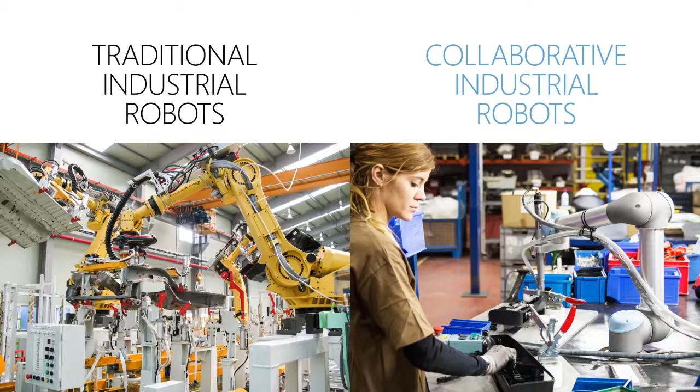Most of you are probably familiar with traditional industrial robots like the ones you see on the left side of the screen, but some of you may be slightly less familiar with collaborative robots, or cobots. You can obviously see the difference in size and the amount of safety equipment needed with the traditional industrial robot. Collaborative robot automation really is the way that the market is moving forward.

So what is a cobot? A cobot is simply a robot that is designed to work safely with or near human coworkers. While safety is obviously a key aspect of a cobot, UR takes the term collaborative a step further and also includes ease of deployment, ease of use, and maintenance.

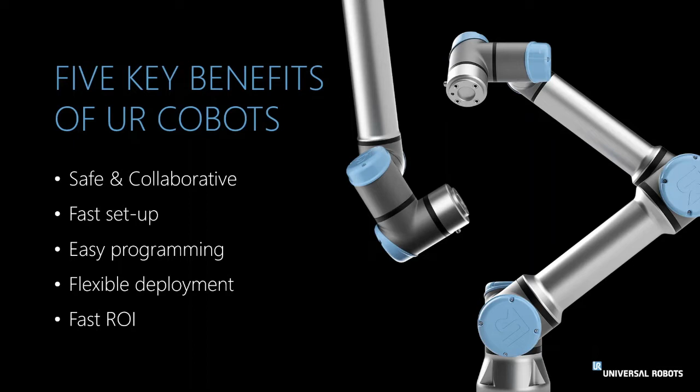So while safety is in fact a key aspect of our cobots, what really sets us apart is that we are fast to set up, easy to program, and flexible to deploy and redeploy. All of those benefits combine to give Universal Robots an industry-leading fast return on investment.

So what are some ways that cobots can help your company? Cobots are excellent for automating current manual tasks, and can greatly increase efficiency, quality, and throughput in many manufacturing processes. At the end of the day, this can help to shift workers from those dull, dangerous, and dirty jobs to higher value-add tasks that workers really prefer to do.

Collaborative automation is really a new way of thinking compared to traditional robot automation. What I mean by that is humans and robots should be collaborating, because both are uniquely good at doing their own set of distinct tasks. Humans, for instance, are really good at new, unique tasks and problem solving, where robots are really good at the more repetitive tasks. So combining those really creates a lot of value and productivity.

UR's average payback time is typically less than one year. The payback time you get from your cobot can obviously vary, and we've seen ROIs as short as 34 days, in the case of Task Force Tips, a manufacturer that uses our cobots for machine tending. So I encourage you to check out this case study on our website and many others like this.

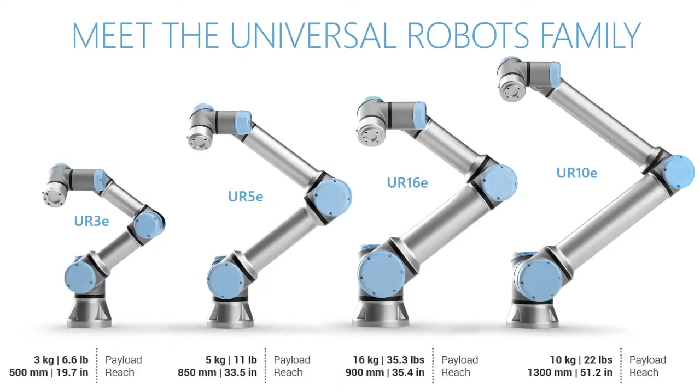I want to introduce you to the UR family. Universal Robots has 4 models: the UR3e, 5e, 16e, and 10e. The model number indicates the payload capacity in kilograms. So based on the model, our payloads range from 6.6 pounds up to 35.3 pounds, and our reach ranges from 19.7 inches all the way up to 51.2 inches.

The UR controller is available in 2 different variants: the standard E series, which comes with an IP44 control box, and the OEM version, which is basically the guts of our standard controller and can be built into a custom panel.

The controller comes standard with 16 in, 16 out digital I/O, 2 in, 2 out analog I/O, and an Ethernet interface used for Modbus, Ethernet IP, and Profinet. As far as power requirements, our controllers run on a 120 volt standard outlet. Our controller is fairly compact, roughly 19 by 16 by 10 inches, and weighs right around 27 pounds.

I want to talk a little bit about UR+. UR+ is another way to speed up your deployment. The UR+ ecosystem is a big differentiator for Universal Robots. It's made up of hundreds of tested and certified products that are ready to plug and produce with your cobot.

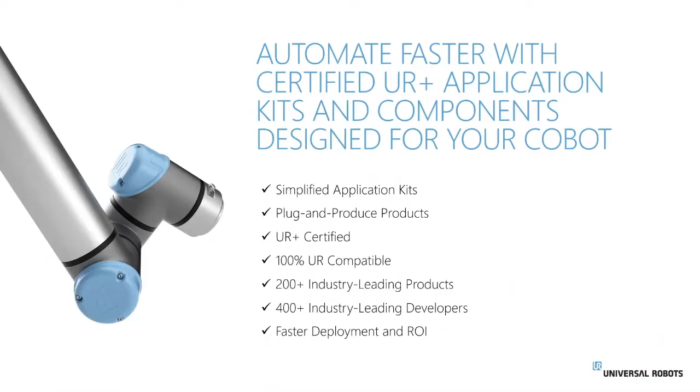The goal of the UR+ ecosystem is to shorten the time it takes for you to implement your automation project. To get you there faster, we have a selection of hundreds of products across dozens of different applications that have been certified by our team to be easy to use, compatible with your cobot, and ready to go with all the software, hardware, and everything you need to get started.

On the UR website, you can explore all the different UR+ plug and produce tools for your cobot applications. This is a small sample of some of the partners on UR+. We have over 400 partners, and this is really growing at a fast pace.

I want to shift over to training quickly. The UR Academy is an industry-leading training academy offered by UR, both in-person instruction and also complimentary e-learning online.

UR is the only robot manufacturer that offers training of this caliber free of charge. We think it's vital to narrow the skills gap and get more people up to speed with robotics faster. So for small and mid-sized manufacturers, this can also be critical to how you address some of your labor challenges.

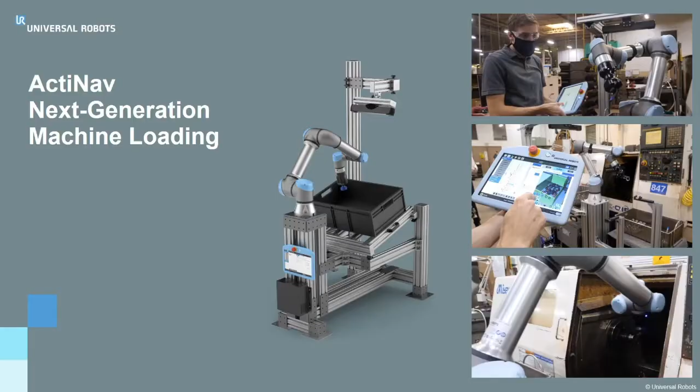With that, I would like to turn it over to Eric Anderson, UR Product Manager, to talk about ActiNav and to demonstrate our autonomous bin picking solution.

Thanks for that great introduction, Ernie. Again, my name is Eric Anderson. I'm the Product Manager for ActiNav, and it's a real pleasure to be with you here today. So where shall we begin our demo?

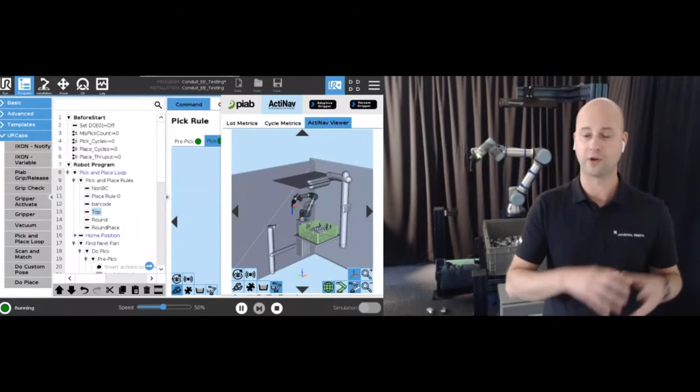What is ActiNav? ActiNav is the platform. ActiNav, of course, needs 3D scanning and matching algorithms, but it ties all of this together into a product designed exclusively by and for Universal Robots, into an ultra reliable and ultra easy to use system. We're going to talk about what technologies are built into the product that make it so unique, reliable, and easy to use.

So let's get through the demo. We'll start to use the system, and as we go, we'll answer some questions along the way. The setup behind me is running at just half speed, nice and safe. Let me get that out of the way there. And so it's a UR5E.

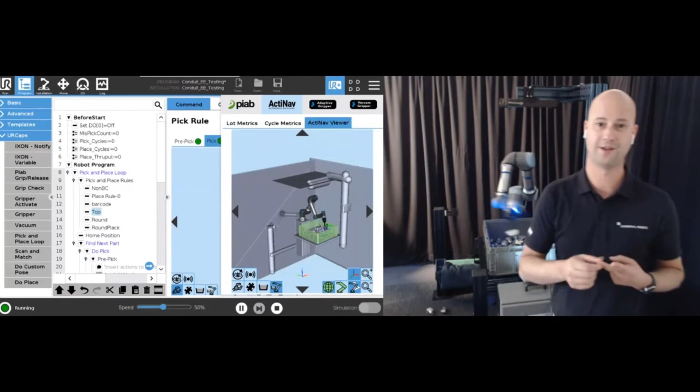ActiNav works with the UR5E and 10E, and the ActiNav kit consists of three main pieces: the user interface, which is installed on the teach pendant, so all programming is on the teach pendant; a 3D sensor, mounted right here, which I'll explain in more detail; and the third component, the autonomous motion module.

There's a black motion and vision processing unit that's connected to the robot controller via Ethernet. So those are the three pieces. On top of that, what you need to add to the robot plus the three pieces of ActiNav is an end effector that's suitable for the part or the application you're doing.

Of course, some custom framing is needed too. This is actually a standard frame designed by Vention for the UR5, for ActiNav with the UR5 and a medium sensor, as well as whatever placement target, regrip fixture, inspection cameras, sensors, switches, and other things you might need. So those are the major pieces.

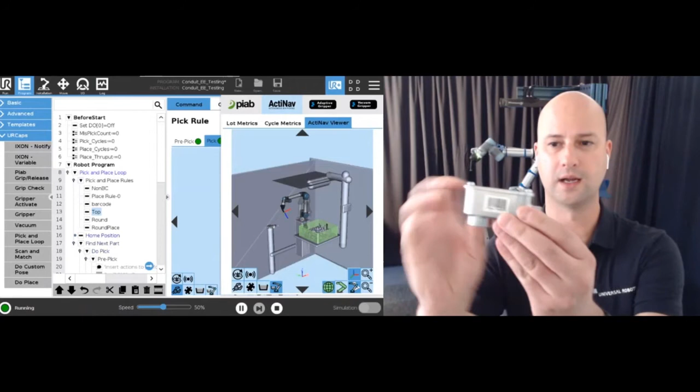The part we're going to be picking today is this demo conduit part. It's a somewhat shiny metal part. We're going to be picking from the top.

This side we call the barcode side because it has a barcode, and this side the clear side. You can see it's a completely unique 3D part, unique geometry. It's planar symmetrical in this way, but we're going to pick it from three different ways.

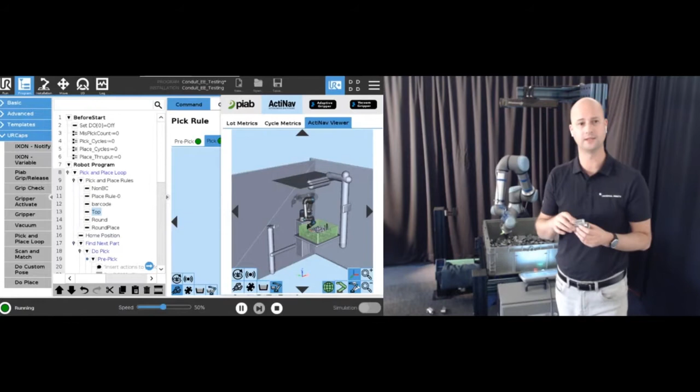We're going to place it in a fixed location. ActiNav works with any end effector, so it works with a whole variety of UR Plus pre-certified end effectors, or you can design completely your own custom end effector.

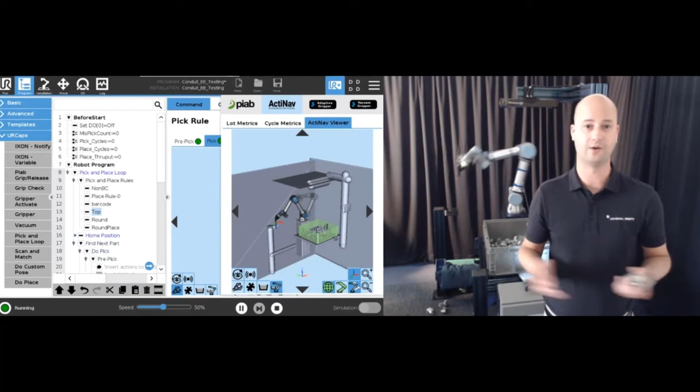But regardless, ActiNav, when it operates, is going to be completely collision-free and singularity-free, not just of the robot from hitting things, but the robot, the end effector, including custom end effectors, and the part while holding the part. So also the part will not hit anything in the environment. So the question is, how is this possible, and how does this thing work?

Let me go ahead and stop it, and we'll walk through the setup. Now, the setup is a 6-step setup to configure the system, and we'll just walk through the major pieces there. Okay, so here's the 6 steps.

So step 1, you get a robot, you get an ActiNav, you get a frame, you get an end effector. You bolt it all together. What happens? You take the AMM, the autonomous motion module, and an Ethernet cable that comes in the kit, and you plug in that computer, that processing unit, into the UR controller.

And that basically now augments the capabilities of the UR cobot with autonomous motion or self-deterministic motion. It's very simple to do that. You hit this pair AMM button. And what happens when you pair the AMM with the robot is it identifies the model of the robot.

It pulls in the calibration files that get set at the factory, so we have an exact model of that exact robot that AMM is connected to. Okay, so now we know what robot we're connected to, and we have a 3D model of it.

The second thing we're going to do is mount the 3D sensor. So we take the 3D sensor out of the box, mount it at the appropriate distance above the bin, and we need to perform alignment.

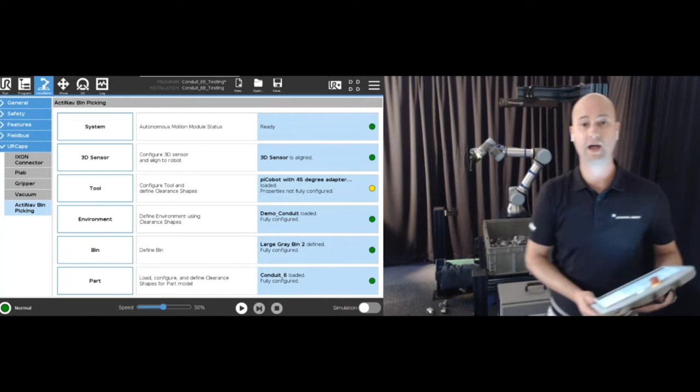So what you do is this dome comes in the kit, this half dome. You attach it to the end of the robot, and you take the robot in free drive mode. So it's got this great free drive functionality on the bottom, and just position this dome at 8 different positions underneath the 3D sensor, and then it aligns the sensor space to the robot space.

So that's pretty easy. So we hit a button, we did alignment. That's probably 15 minutes. The next thing is the tool.

So I mentioned earlier that when ActiNav is running, the robot, the end effector, and the part will never collide with anything in the environment. So the way we do that with the tool is you can load a CAD model of the end effector, and you can load up to 100 different end effectors into the system.

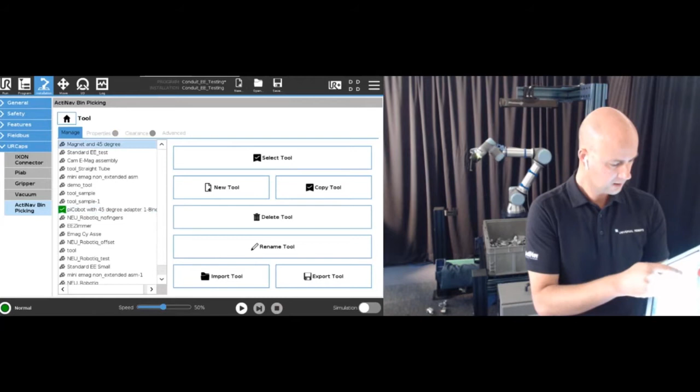And we create clearance shapes. So here's the first introduction to the concept of an environment and clearance shapes. So when we hit that pair button, I'm going to turn the world off. When we hit that pair button and we pulled in a model of the robot and its exact calibration files, we automatically generate these green shapes, these green bubbles around the robot.

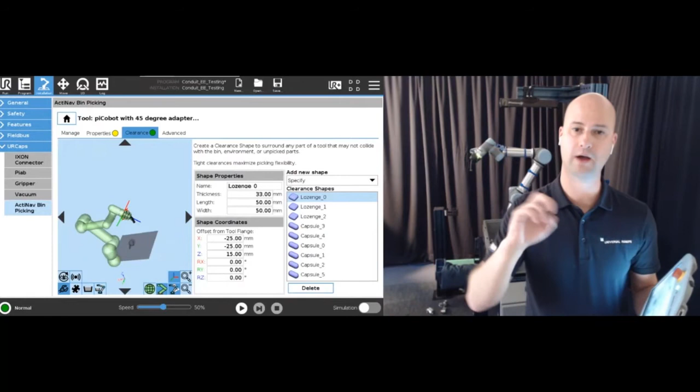And so we know the kinematics of the robot, and we've put shapes around all of the moving features. But the end effector, because we can put any end effector on ActiNav, we don't know about its geometry. So we simply create these clearance shapes. In this case, we've used these lozenges, these little bricks, to sort of approximate and cover the end effector.

So now, when the system moves through the space, those green bubbles around the robot and the end effector will never touch anything in the environment. Okay, so the next question is, well, what's the environment? So let's look at that together.

So you probably saw this on the screen before. So the environment is a simplified representation of anything the robot can touch or anywhere you don't want the robot to go. So they can be real things in the environment or virtual things.

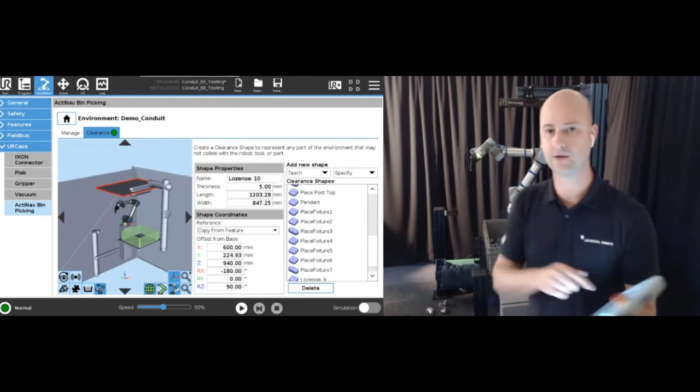So the object I have highlighted here is a ceiling. I've placed a ceiling about here, looks like it's right around the middle of the 3D scanner. The robot will never go through that ceiling. Wherever there are clearance shapes in ActiNav, the robot, the end effector, and the part will never enter any of those shapes. That's how it works.

You basically define what this space, what its operating space is. Real objects, of course, you don't want it to collide with, but also you define where you're going to allow it to operate within.

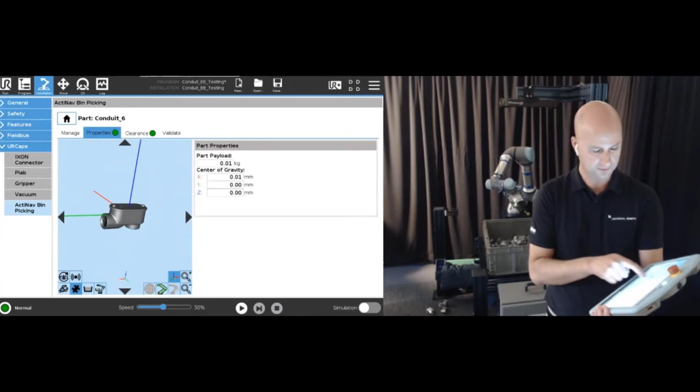Okay, the last piece of the setup is the part. You can load up to 100 different parts into ActiNav. You're of course going to set up your properties. Here's the 3D CAD model. We are utilizing CAD-based matching algorithms. What we found is they're the easiest, they're the most accurate, and also the easiest to set up from the number of knobs and buttons that we need to expose for users.

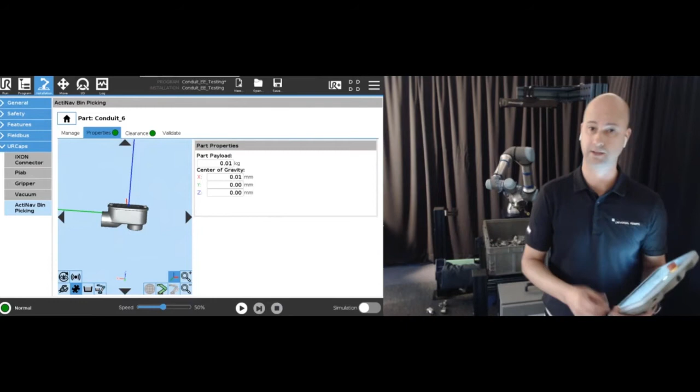They're also very precise and especially useful for the application that we're targeting, which is machine loading, where we expect one type of part to be in the bin. So we don't do any sortation or handle 50 different parts inside the bin and figure out what's what. We expect everything in the bin to be the same. You do a run, you pick everything, and you place that into the machine.

You can see we've added a clearance shape around the part. So if we pick it this way, we're going to move it through the space collision free. If we pick it this way, we are also going to move it through the space collision free. Each path that ActiNav self-determines to take is unique. It's different every time, and it is based on the way that that part is particularly picked.

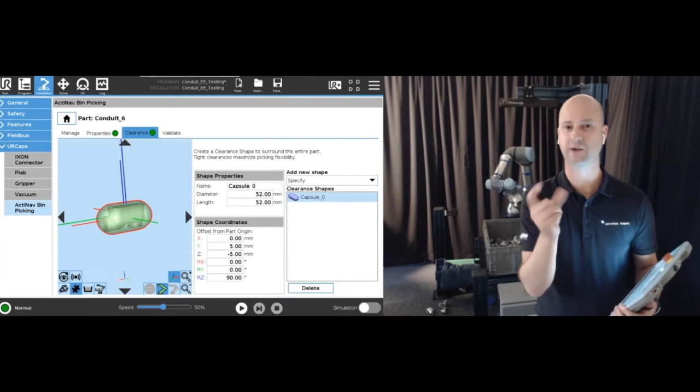In this case, it's a relatively spherish part, right? It's a capsule. But if you're picking camshafts that are this long, it really makes a difference how you move through the space. It's really important to have a model of that part that's picked to make sure that as it goes through the space, the part never collides with anything in the environment.

The last thing that we need to do is set up the CAD matching parameters. ActiNav makes this super simple. There's basically two parameters that you need to adjust, and you can see those here. We support two types of matching algorithms, and there's a couple of parameters for each.

The first kind is volumetric matching. That's really suitable for 3D parts. That's what we're going to use here today on this conduit demo part. You see two values: one is a minimum confidence threshold, and the other one is a quality versus speed slider. Quality versus speed slider is very easy to explain.

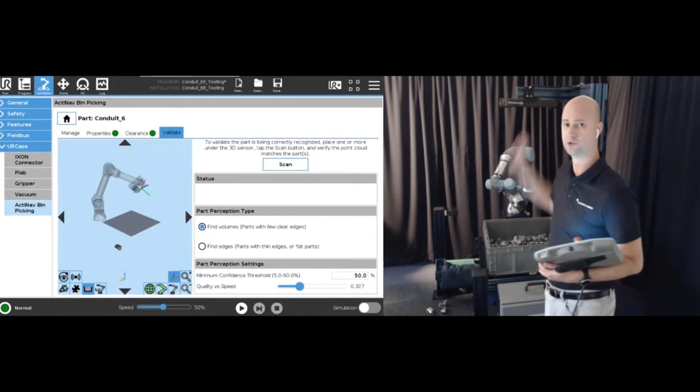The raw point cloud from this very high resolution 3D scanner from Photoneo is capturing 3.2 million points, so it's a very dense point cloud. If you're scanning a big drive shaft, for example, or a large cast part, then you probably don't need all 3.2 million points to do matching on that part. If you're scanning a very small electronic part, you very well may want to use all 3.2 million points. So quality versus speed is just basically a filter for how much subsampling that you do.

And the minimum confidence threshold is simply, imagine that there are 100 points on top of whatever part you can see. So you have a CAD model that has where all 100 of those points should be, and then you have a 3D scan of the part from the 3D scanner. How many of those points need to match the CAD model, the ideal, until you say, yep, I have successfully matched that part? So that's matching.

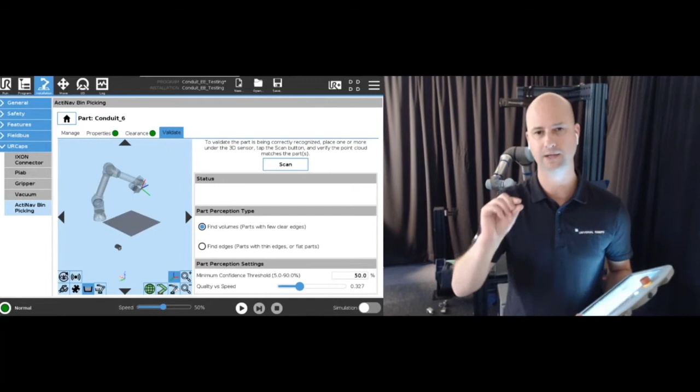The other matching algorithm type is 3D edge detection, and that's really suitable for brackets and sheet metal parts and bent metal, formed metal parts. In that case, instead of looking at 100 points over the whole surface of the part, particularly for flat parts where there's just going to be large swaths of flat, we actually look for the change in normals. In other words, identifying the edges, identifying the bends, the folds, and we actually use that method for matching.

So ActiNav is like a platform. You'll see that it'll support a variety of different technologies over time as we go here. But let's focus on what we have today, which is these two sensors, medium and large, and these two matching algorithms.

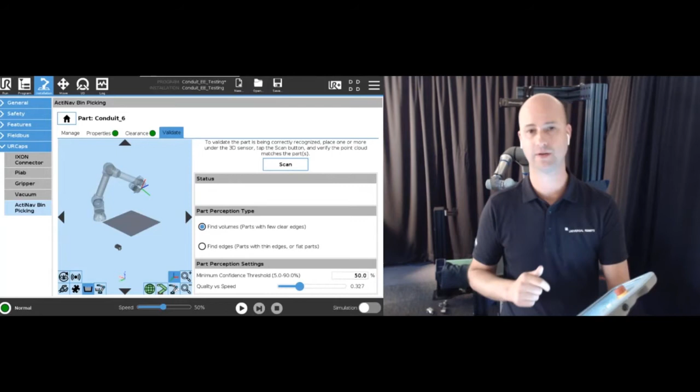They cover a ton of different applications. So, that's the last part of that.

I can tell you we've held multiple training classes, and with a physical setup, robot mounted, end effector sensor, to program these 6 setup steps, for first-time users it's about 2 hours. Once you get a little experience, it's more like 30 minutes. So it's very quick to add new parts, modify the environment, import new end effector types, et cetera.

The ActiNav piece of the program has 4 major sections. There's the pick and place rules. That's where you teach ActiNav together how you want to pick the part and where you want to place the part.

The next section is the home position. That's just a starting point, not necessarily the home position, but a starting point out of the field of view of the scanner. And then you have the 6 steps for picking: home to pre-pick, pick, post-pick, pre-place, place, post-place, and back to home.

For each of those 6 steps, you can set variables, do logic statements, basically anything you can do in UR, you can do at each of these points. You can check if you have a part, check grip, set a counter, check your average cycle time, all sorts of things.

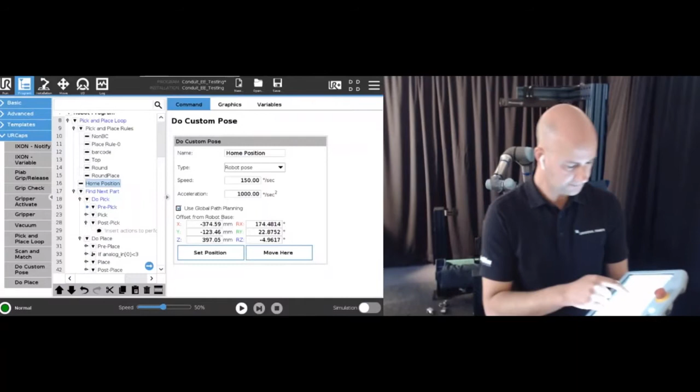ActiNav does any combination of pick and place rules. You can have one pick rule to multiple places, multiple pick rules to one place, or multiple pick rules to multiple place rules. Those are for different workflows. I can mention a few of them now.

What we're going to do today is the simplest workflow, one pick rule and one place rule. What you saw running behind me before is 3 pick rules to 1 place rule.

Some of the workflows that these one-to-many, many-to-one, many-to-many combinations enable: we seamlessly integrate with external 2D inspection cameras. Often you might want to pick a part and hold it in front of a third-party 2D inspection camera, a Cognex, a Keyence, a SICK, or whatever, Datalogic, Microscan. The camera runs its own independently programmed inspection, checking for a ring, a seal, a defect, whatever, and then it sends an I/O signal into the ActiNav program.

You would check the I/O signal, either the part's good or bad. If the part's good, it goes to place location 1 in the machine. If the inspection is bad, it places it into a reject bin or a fail location. That's one example of one pick rule to multiple place rules.

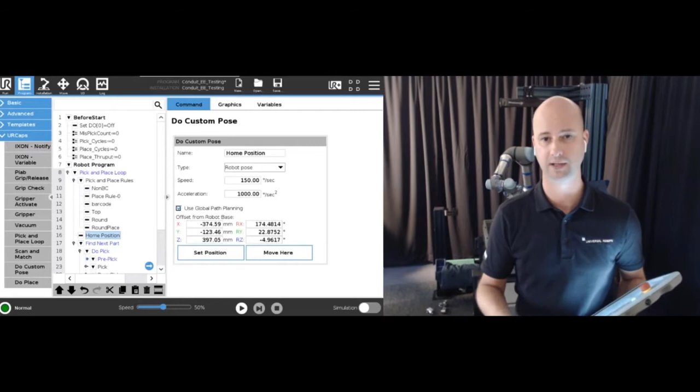Most common is multiple pick rules to a single place rule, because you often need to pick the part in 3 or 4 different ways to get good bin picking, good bin yield, bin pick percentage. But for placement, you might actually need to place it just one way, since it only goes into the final machine one way. That's where you'd have multiple pick rules to a single place. Just a few examples there.

So let's do this: let's suppress all of our pick and place rules, and we'll train a new pick rule and a new place rule. We're going to do this together here.

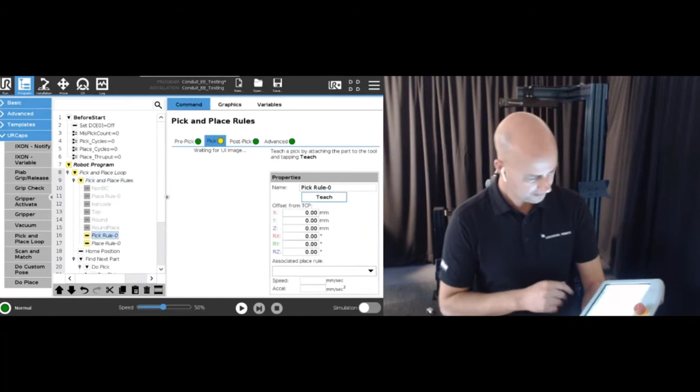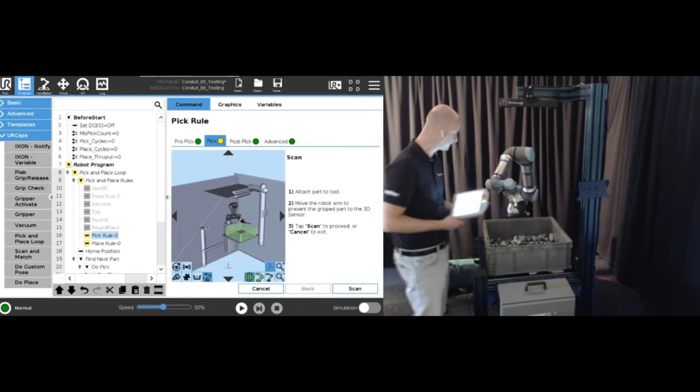So here we're going to train the new pick rule. Again, it's all very hands-on, teach-by-demonstration style programming. When I hit this teach button, it gives me on-screen instructions: attach the part to the tool where you want to pick it, move the arm with the gripped part underneath the 3D scanner, then hit scan. So let's go ahead and do that. We'll put this here, and we're going to pick this part in the middle of the clear side. I'm going to turn on the vacuum.

I'm going to physically attach it where I want to pick it, and then we'll hit scan. You'll see that it's now remembering the way that we have picked that part. And that's it—that is a pick rule training.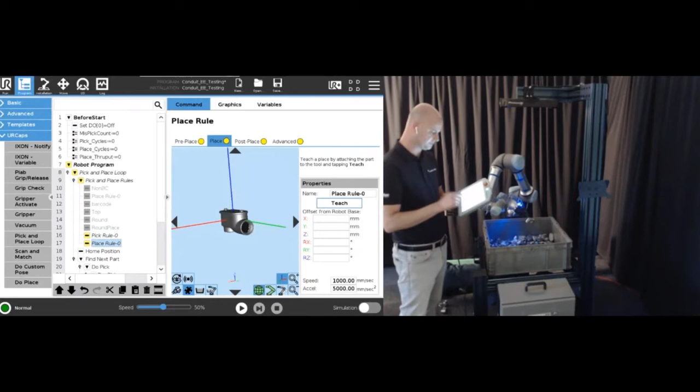Okay, let's do place rule training. Again, there's a teach button. We'll hit teach—it gives us the same initial steps. So we'll go ahead and hit scan. Now it asks us to place the part how you want to place it. So in this case, we'll place it in my hand.

Let's say here—so it's going to place this part in this orientation in space here each time with this place rule. So we'll hit accept that.

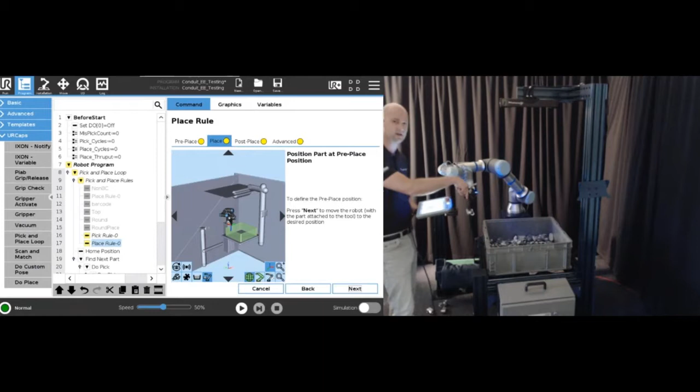And then we want to know, how do we want to approach this place location? In our case, we want to start here, go straight down, and come up. It's a very simple place, but you could have more complex places where you come in from the side, rotate it, and then come up, for example. In this case, we'll just go straight up in the air. So we'll call that pre-place, and post-place we'll just go straight up again, just 2 inches, and we'll hit done.

So the only thing left is to associate the pick rule with the place rule. Is it 1 to many, many to 1, 1 to 1? We're going to go 1 to 1, and now we can run the program.

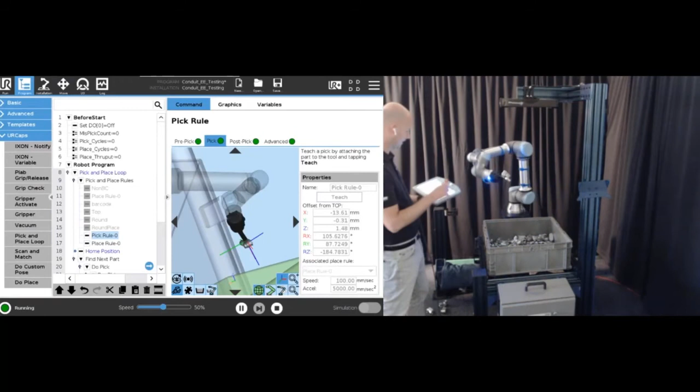The only caveat is there's parts laying in all sorts of orientations, but we've only trained just the one. Oops—I forgot to turn the suction off. I should have that at the beginning of my program, see? There we go. Okay, so I'm just going to make sure that there's at least a few parts facing up for that one side.

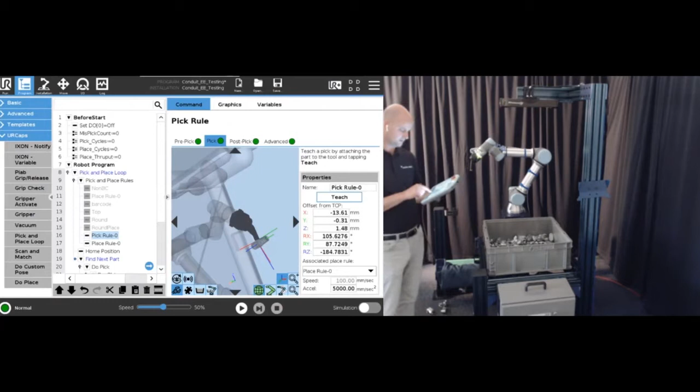Now we can, of course, train the other sides as well, but let's go ahead and play our program. We're only going to pick parts in the middle on that clear side. We're going to allow the end effector to pick 360 degrees at that point. And then we're going to place it here in my hand in the part relative orientation. What I mean by part relative orientation is that we've defined it to place in my hand so that the flat is on this side and the center is facing forward here.

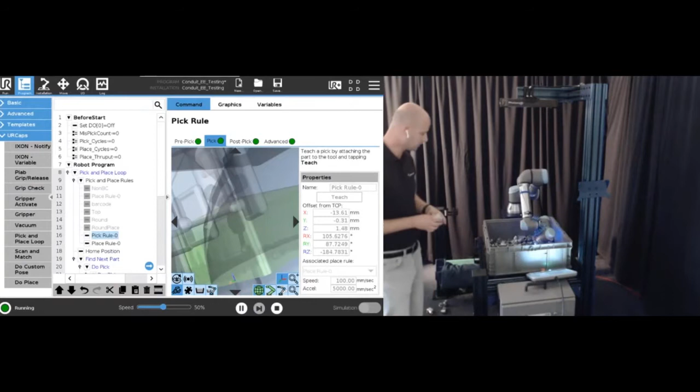So you'll see each time it places, the robot joint configurations are all unique. Every time, the path and the robot joint configurations are unique—it's figuring out whatever joint configurations are needed so that at the end of the day, the part is like this, in this location.

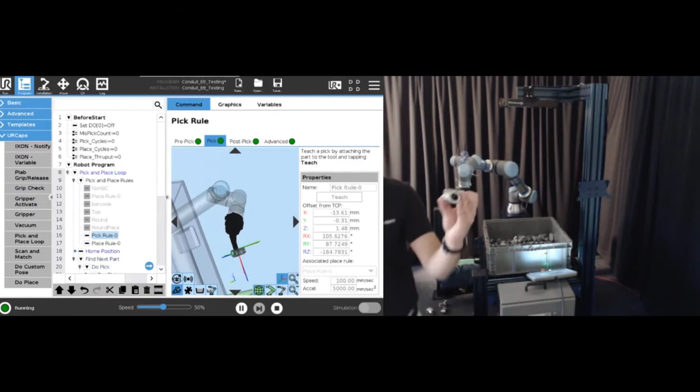And we call that feature part relative placement. In other words, we haven't trained robot poses. We haven't trained a specific robot pose to place into. What we've trained is we want the part to be here, we want the part to be in this orientation. And then the robot figures out, ActiNav figures out how to make that happen. And that's how it works.

I'll make this the last one here. Okay, and then—so that's our demo. That's how the system works.

That's how you do the pick training and the place training. You really show it: I want to pick it this way, I want to pick it here, and I want the part to be here in space, in the environment, in the world. In this case, it was in my hand. In the other case, it was in the fixture. If there's a regrip fixture, that would be the same.

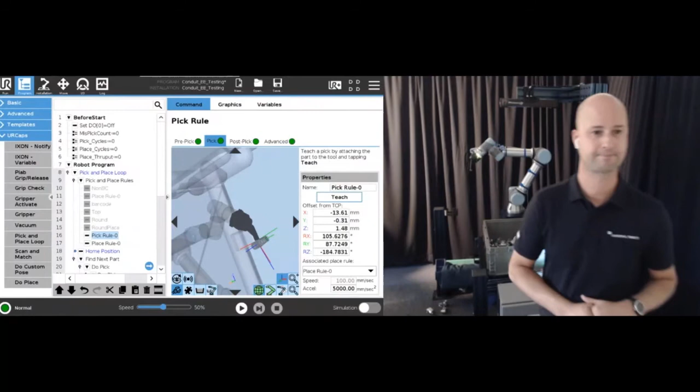I'd like to spend the next 10 to 15 minutes talking to you about OnRobot, who we are, what we do. The title of my presentation is End-of-Arm Tooling and Accessories for All Collaborative and Light Industrial Applications. So let's get started. Our motto at OnRobot is One System, Zero Complexity. I have a live camera feed set up here in the lab with a UR5. I'll talk to you about that one system, zero complexity, and how that works.

Before we do that, let's talk about our vision at OnRobot: building a one-stop shop for collaborative and light-duty industrial robot applications. Our goal is to have the most extensive range of products that cover all robots, all applications, all accessories, encompassing all industries.

OnRobot really does allow you to build that highly versatile robot solution.

To talk a little bit about the company, we are a global company based in Denmark, just down the road from the guys at Universal Robots. I am here today in our Dallas, Texas office, our headquarters for the US. We've got roughly 200 employees across the globe, and 30 to 40% of those employees make up our R&D team. So we are constantly launching new products every quarter, and really excited to see what 2021 will bring.

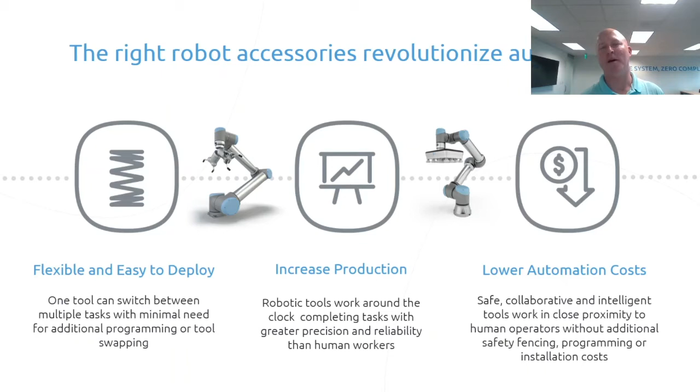The right robot accessories revolutionize automation. When I think about cobots and their position today, flexible, easy to deploy, increased production, lower automation costs - all of these things are certainly buzzwords when we talk about cobots or collaborative robots. For me today, I'd like to focus on the flexibility and the ease of use or ease of deployment. You'll see in my live presentation how simple it is to switch tools for applications, and then no doubt Universal Robots makes it extremely simple to program these robots.

So from here, I'd like to switch over to the live presentation. You'll see here I've got a UR5 set up in my lab. Here on the flange of the UR5 is our quick changer, and I think this is really what makes OnRobot unique, so let's start there.

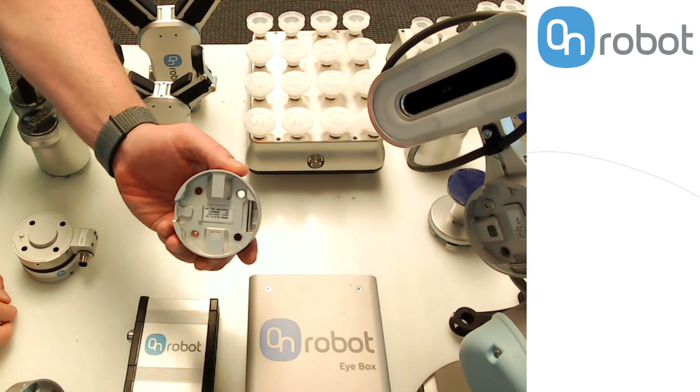This is kind of where it all starts with the quick changer. I hold in my hand here a single quick changer, so this bolts right to the flange of the robot like you see here for using a single tool on the robot. We also offer a dual configuration, side 1, side 2. Multiple tools on the end of the robot can really increase that robot's productivity - we can have 2 of the same tools, or maybe even 2 unique tools to solve a unique application.

And then the third option is our force torque sensor - a quick changer with an optical force torque sensor, to give that tool a sense of touch and feel.

So if we go back over here to our UR5 with our single quick changer, you can also see I have our OnRobot Eyes. We offer a 2.5D vision solution. Here on the outside, I have our newest product, which is our external light source for the camera - really simple to set up, easy to use, a very powerful tool to give that robot vision with the OnRobot Eyes. We can mount it here like you see on the robot, or we can mount it externally, maybe overhead a conveyor or a machine.

But what I'd like to show you here is if we start looking at our tools, all of our tools have this built-in tool side quick changer. So we have the quick changer robot side that mounts to the robot flange, and all of our tools have this built-in tool changer, so we simply connect the tool, it clicks into place. We now have power and data transferring from the tool to the robot controller. I simply push the button and the tool comes right off.

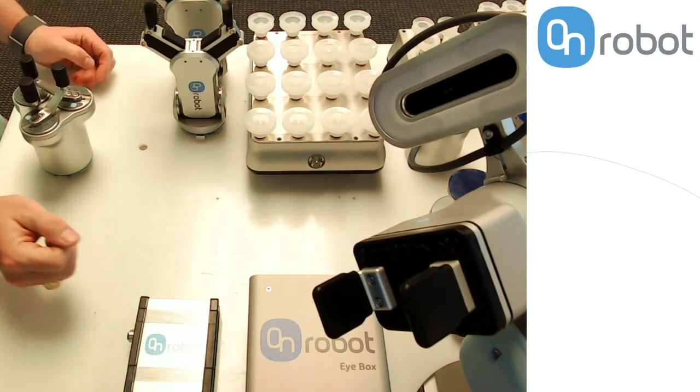So as we look at our 2-finger grippers, we'll start with the 2-finger and 3-finger grippers - a couple of variations for different payloads here in the RG series. Flexible in that we can adjust the mount, flexible in that we can customize fingertips, whether we 3D print or machine those fingertips. We also have a 2-finger in a parallel style here - this is our 2FG7, extremely fast, we're talking now close to pneumatic speeds, IP67. So as soon as I connect that tool, you can see that I'm functioning right there from the UR pendant.

I'll remove our 2-finger gripper here, show you the 3-finger, the 3FG15, made for cylindrical parts. We can close on the OD, we can open on the ID. As soon as I connect my tool here to the quick changer, I now have full control of that tool - one system, zero complexity.

One thing to keep in mind with our 2-finger and 3-finger grippers is that they're fully electric, smart grippers, so they're not just on, off, open, closed. We can tell our gripper to go to a certain width at the fingertips, close at a certain force, or move at a certain speed. So there's a lot of feedback and control on the gripper.

So it's not just one gripper for one application. We now have one gripper for many applications, different shapes, sizes, and parts. Really flexible there, right? I'm going to move these here.

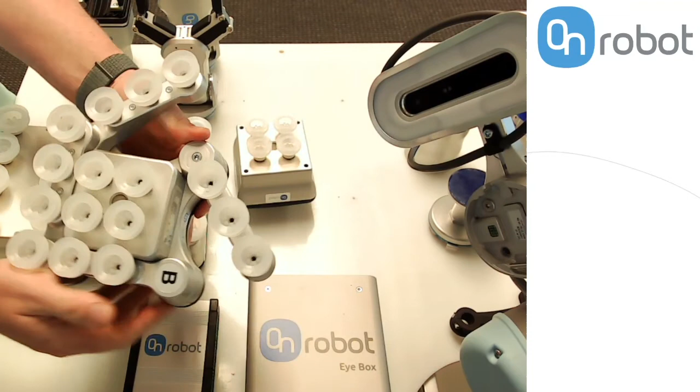Let's talk a little bit about our vacuum grippers. We make those in a couple of variations, including vacuum grippers with movable fingertips so you can create your own format to meet your product needs. All of our vacuum grippers have multiple zones that you can control, and use standard G1/8 cups, so if you have a specific cup for the application, you can certainly use that.

We have the VGC10, a smaller compact gripper to reach into smaller, tighter spaces. This also has multiple zones. I'll show you as I connect this to my quick changer and actuate the gripper. You notice I don't have any air lines or air compressors - no need for air compressors with any of our vacuum grippers. We generate the vacuum right on the tool with an electric pump, so no need to mess with air compressors, leaks, and maintenance. You just simply connect the tool and it's ready to go.

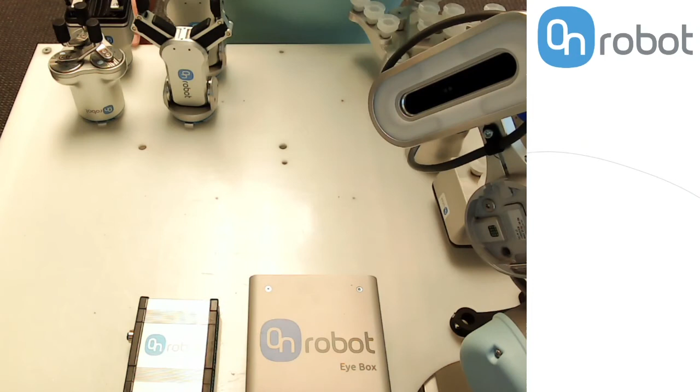We have palletizing grippers - the VGP20, capable of up to 20 kilogram payload for palletizing and depalletizing. Multiple zones, no need for an air compressor, right? I'll show you the last little bit of our gripper tools.

We have the soft gripper, IP67, FDA approved, with a few variations in the skirt, unique for applications in food and beverage, textiles, and it's fully electric, no need for compressed air either.

The magnetic gripper, MG10, has fully adjustable magnetic force. I don't need a separate power supply - it's the same connectivity. Imagine a destacking application: we come in at a low force to pick the top sheet, once we have the top sheet we engage the force and move to the target, right? So it's fully adjustable up to 10 kilograms.

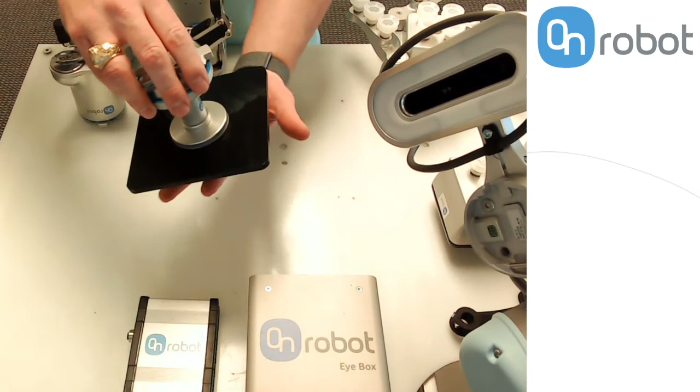And then our Gecko gripper, fully mechanical, no electricity or air required. This is excellent for applications where we need to make sure we're not leaving any marks on the surface. We make this in a few variations of sizes and payload capability.

That's our Gecko technology. The last few things I'll show you are process tools. We have an electronic sander and an electronic screwdriver. Our sander runs from 1,000 to 10,000 RPM, fully electric, no compressed air needed. I typically see it paired with a force torque sensor so we can apply a known force to the surface with our sanding, or we also provide a polishing pad.

So fully electric, we're able to adjust the RPM right there on the UR teach pendant, and again we don't need to mess with compressed air. The electronic screwdriver offers up to 5 Newton meters of force, with nice smooth round edges for the collaborative environment. When we pick the screw with our magnetic bit, the screw retracts inside of the housing, right?

So that's just a brief look at our tools. Just wanted to give you an idea of the plug and produce functionality with our one system, zero complexity. Now what I'd like to do is bring up our website to show you a few areas that I think are important to you.

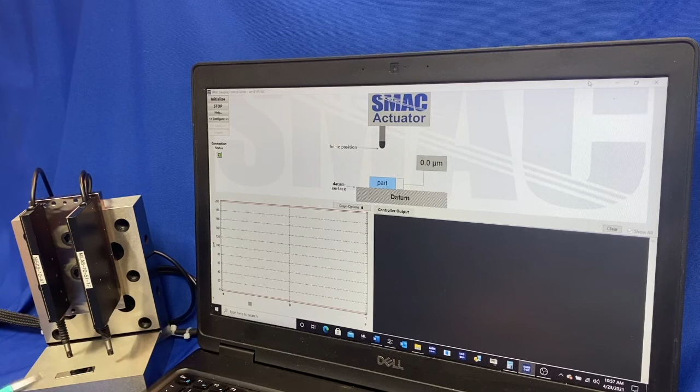In this video, we are going to be demonstrating the LCA8 series actuator with our gauging control center software. In this setup, we're using a 10 millimeter stroke actuator. We've selected a 1 micron resolution encoder for the actuator. The actuator itself has a linear guide rail built right into it, well guided, with an extended nose bushing on the front. It also comes with an IP65 rating.

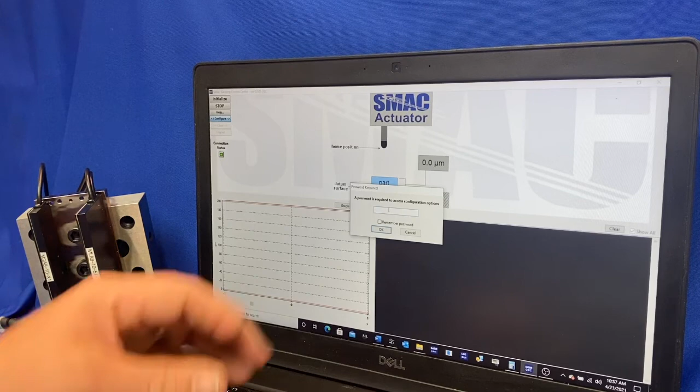So let's start with the software. I've opened it up, and it's automatically connected to the probe. We see the green status here, green light. We'll go to configure, enter in our password. Currently we're on the operator interface, so it's password protected to get into the settings and tuning tabs.

Okay, remember the password. There we go.

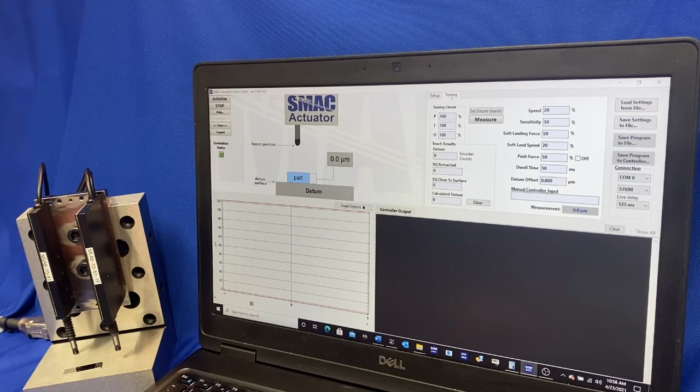Now, as you can see on the right here, we have our setup tab. We also have a tuning tab. In the setup tab, we'll select our actuator, our type of measurement, whether we want it to be in millimeters or microns or inches.

And we can set the datum. We can measure here from the software or via discrete input to the controller externally. And then a position close to part, that's so we can set up a position to do a rapid traverse close to the surface prior to taking the measurement. And it saves on cycle time and throughput. We can use this and optimize it.

We've got places where we're doing part measurement at 80 to 100 parts per minute with these actuators, down in the micron level. In some cases, sub-micron level, we're able to measure as well. So, and then set the limits here as well.

And then over here in the tuning tab, we have the PIDs. Those are just default. We can leave those alone. There's no real need to change those.

Teach results, we'll go through a teach function and it'll display those results here. It's more just for data for later use if we were trying to figure out, troubleshoot anything. And then over here, the speed, the sensitivity, the soft landing force, the soft land speed, push force after we soft land, dwell time, and then the datum if we want to do an offset to the datum surface.

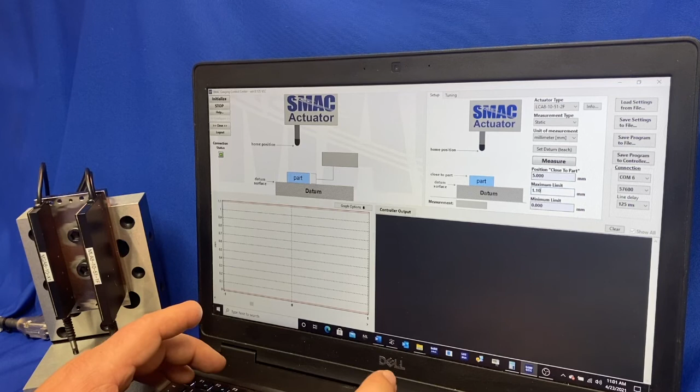Today I'll put 1.1 millimeters in there. For the low limit, I'll put 950, 0.950. And that's adjusted our limits over here on the left.

Tuning tab, we can leave that alone for now. We can go back and adjust that later after we get going if we want to optimize things. So we can save the program into the controller. And simply with filling in this data on the first screen, you can get started doing your first measurements pretty soon, here, pretty quickly.

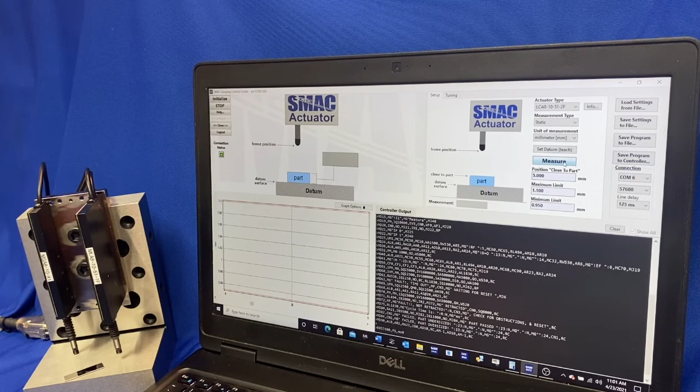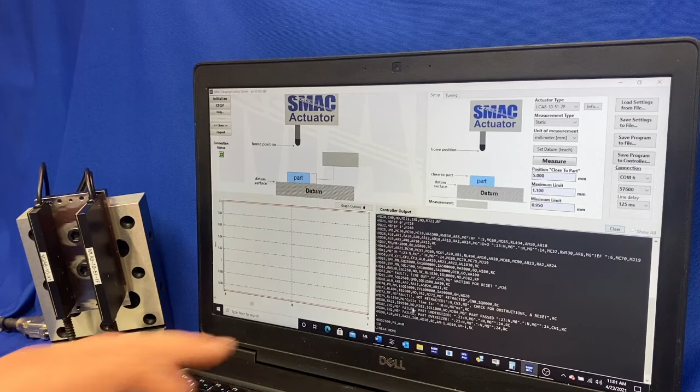All right, so it's gone ahead and homed itself. We'll clear the screen. We got our linear home message back. And now we'll take and measure with it. So I'll just go to the datum surface first. So we have our 0 there like we expected, and we're outside our limits, so of course we failed.

Let's measure again so you can see repeatability there. It's going to be spot on within a couple encoder counts, in this case 1 micron encoder. All right, now the gauge block is in place.

We'll measure on that, and there we have it. 1 millimeter gauge block. We're measuring at 1.002. We might have something on the gauge block or laying there on the tip or something, but for the 2 microns there. But again, within that plus or minus 2 encoder counts is traditionally what we rate these for. There you can see the repeatability of it.

And it's filling in our graph here. I can also choose to go over here and I want to select some points to look at. I can zoom into those and look at those in further detail. As you can see there, it zoomed into it. There are also other options here with the graph. You can go ahead and export the data as a CSV file or as an image. You can do different things here in this option selection here.

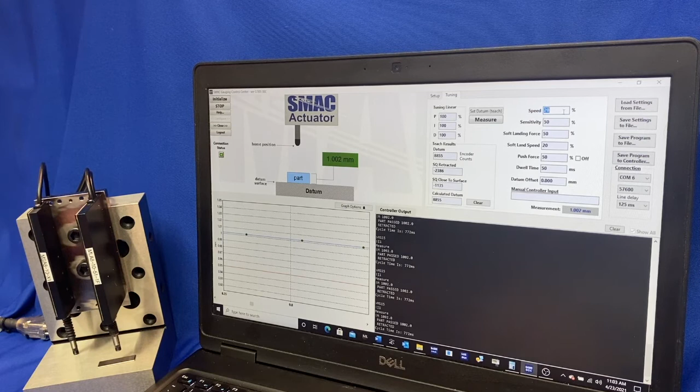In the Tuning tab, you can adjust the speeds. Just remember, when you make changes here, you have to save the program to the controller so it knows those changes were made. It stores them to non-volatile memory as well.

The GUI is not necessary for running the operation. You can use it for setup and then disconnect the GUI and strictly run off the I/O on the controller. So now we'll measure.

We're measuring the gauge block and getting our repeatability there. I'll just go back to the datum surface for something different. And there we go - that's just a quick overview on the SMAC Gauging Control Center.

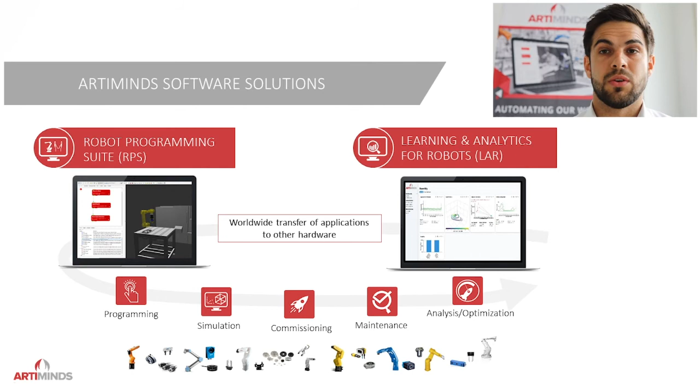This data can later be used for optimization of teach points, for shorter cycle times, and even for more robust processes. So with our two software solutions, you have the entire process from the idea to a running program or process on your robot that's not only fast, but also robust and efficient.

We have companies from different areas that produce different products, and all of that background helps us support our customers in an initial step when they're not sure if some task can be automated or not. This background also helps speed up the actual development process. So we give services to our customers if they need consulting in any sort of way, or we support them along the way when they're creating their robotic program.

Welcome everyone. This session is about positioning this little gear here on top of the motor shaft, like that, with the robot. We're using a two-dimensional camera mounted on top of the workspace of the robot, and we're also using the force torque sensor of the robot, first to use the camera to grasp the object at different positions in the workspace, and secondly to use the force torque sensor to react to deviations if the motor isn't positioned perfectly at the same position. So we're using the force torque sensor to really use the touch sensitivity of the robot to position the gear on the shaft. All right, let's go.

First of all, we're defining a home position for the robot. So we're looking for a position of the robot that is not interfering with the camera and that has a lot of free space and clearances around the robot. So let's move the robot somewhere a little bit to the left, like that, and let's use this as a home position.

So I'm starting to program in the RPS. First of all, let's go online and establish a connection to the robot controller. I'm just clicking the online-offline button here. Now I'm connected to the actual robot. The RPS allows me to program my workflow with an offline robot and also with an online robot, and to switch seamlessly between online and offline programming with just a touch of this button. So now I'm in online mode.

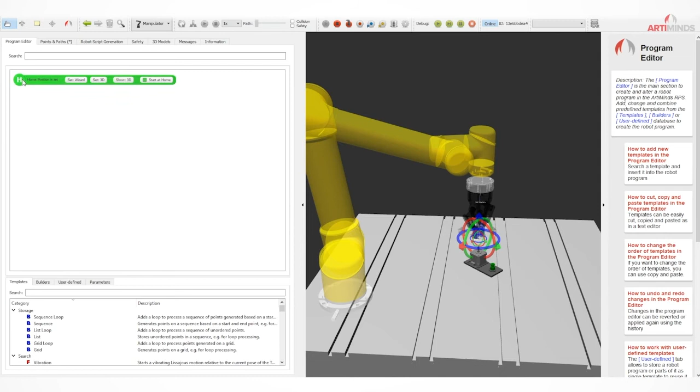I'm clicking on this home position button here, and I'm starting the wizard. By clicking on 'use demonstration,' I'm querying the data from the robot, from the controller, and memorizing it in my project here. So data is transferred and the home position is set. Let's see how it looks. It shows the 3D view. So this is the home position of the robot as it is in the real world.

So first of all, I'm triggering the camera to detect this gear here. We've already set up the camera to search for a circle here. So I can simply use a detector template in the RPS, called Move Linear Detection. The templates with the green V here are the templates that are using a camera. Also, the video shows me that the robot is using the camera to then drive to the detected pose. So I'm just dragging that into my workspace here.

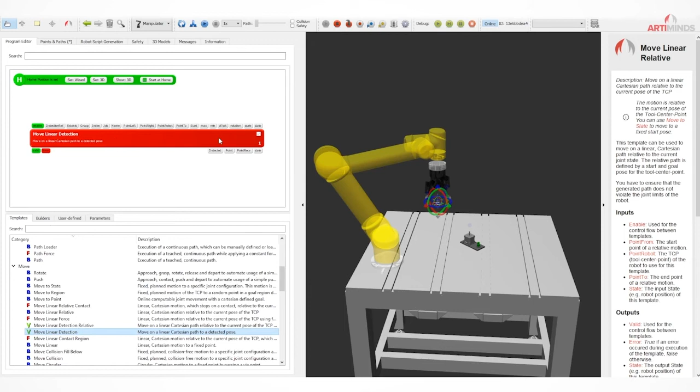And now I'm parameterizing this template. For that, I'm starting the wizard, which queries all the relevant information. I've configured my camera to use detector number 3 for this job, so I'm just telling it here to use detector number 3. Let's see if this is working. Camera is triggered, yes, and we get a position of the object.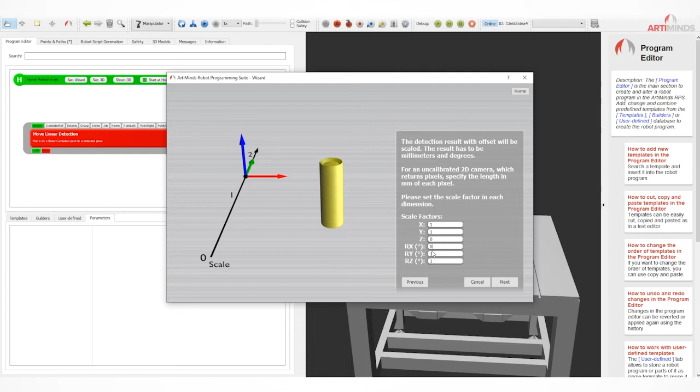We're using that. As we do not want to drive in a relative manner, I'm zeroing this all out here. Also, as we have a rotationally invariant part, I can zero out all the other dimensions here. So we're just using the X and Y position of the camera. Then I can add a safety region here, so whenever the camera detects something outside this region, the robot will not react to it. Let's say we have a 20 by 20 centimeter field of interest.

And of course, now I have to tell the robot where it has to drive to if it detects an object here. So I'm teaching a position above the detected gear. For that, I'm activating the force torque control of the robot, and I'm just guiding it to the position where I would like to have it.

Let's drive a little bit above the gear, just like that. It looks good. So now I'm teaching this position again, clicking on use demonstration, and now I'm finished with this template.

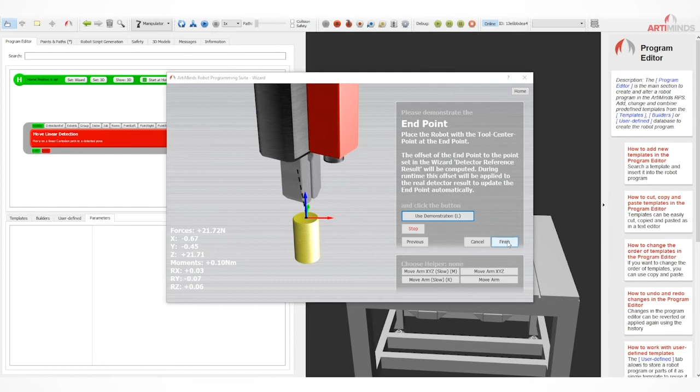All right, let's see how it looks in simulation. So I'm just clicking the blue simulation button, and I see that the robot is driving from the home position directly to the detected pose of the camera.

Now we can go on to the next template, which is the grasp template. So for that we have a grasp relative template. Relative to the position that was given by the camera, we now drive a little bit downwards and grasp the object. So again, I'm starting the wizard here.

We have to teach in the approach position, which is actually the current position. Now we teach the actual grasping point, so again I'm driving a little bit downwards here. Grasp it firmly, and

teach it. Now we demonstrate how much we want to open the gripper before grasping. So I'm opening the gripper a little bit, like that.

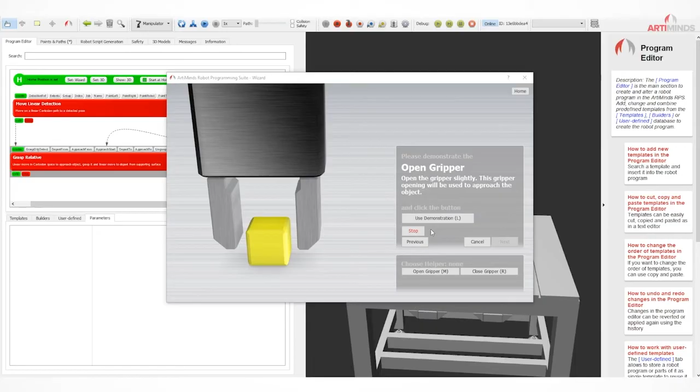And now I can specify the deapproach motion, so how much do we want to lift the object that we grasp. Let's say we want to drive upwards by 90 millimeters.

And I'm done. Again, let's have a look at simulation. Looks good in simulation. Send it to the robot.

For that, I just hit the red play button, which compiles your script code and then sends it to the robot by network interface. So it's really easy. Just by the push of one button, we are driving to the home position and we start the execution of the program.

The camera is triggered and the robot drives to the position and grasps the object. That looks good. So now we can move on and position the gear above the motor. For that, I'm using a linear motion.

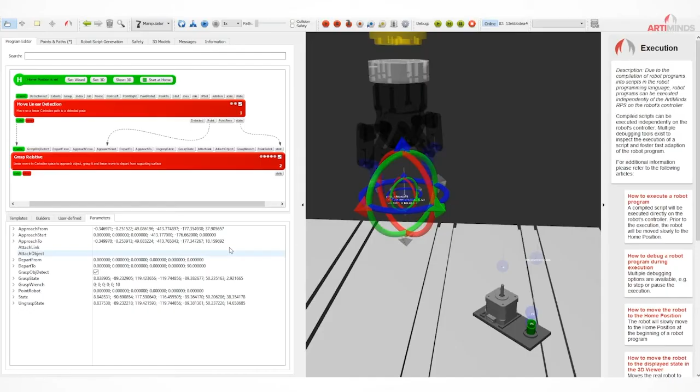Let's position the robot somewhere above the shaft. It's not important to hit the center of the motor exactly, because we're using the force torque sensor to actually detect the perfect position. It looks good. So let's teach that one.

Before we start the search, we are driving downwards until we hit the motor. So we're using a move linear detection, or move linear relative contact template here, which drives downwards until it detects a force.

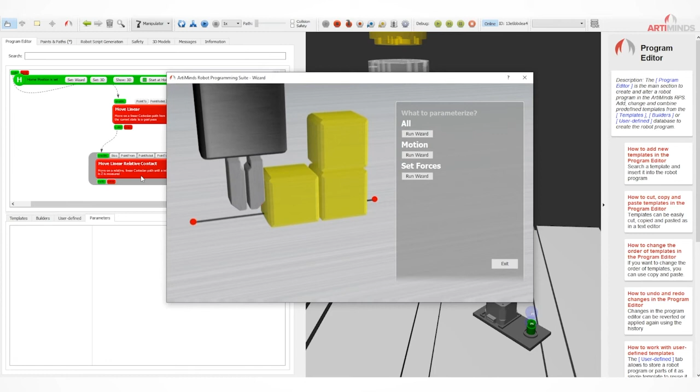So I'm not teaching this template, but I'm just parameterizing it. I'm telling the robot to drive downwards like 1 or 2 centimeters until it hits a force of, or detects a force of 6 newtons.

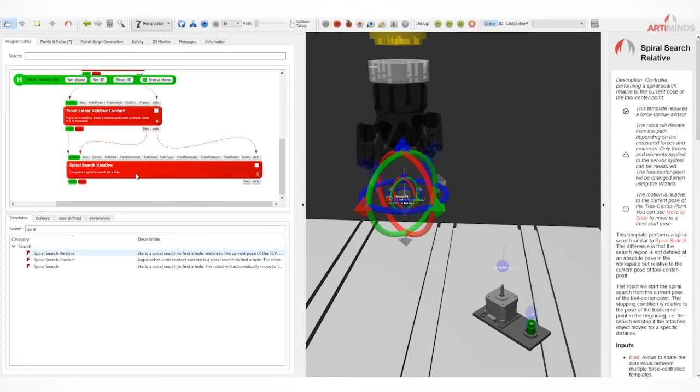After that, we start with a spiral search, spiral search relative. It is important at this position that we connect the bias inputs and outputs of these force templates, so that the robot knows it doesn't have to zero out the forces that are acting. So I'm connecting the bias input to the bias output, and I'm starting to parameterize this template.

So the wizard will guide me through the process. First of all, I have to define the search region here. For that, I have to teach in the top left point of my search region.

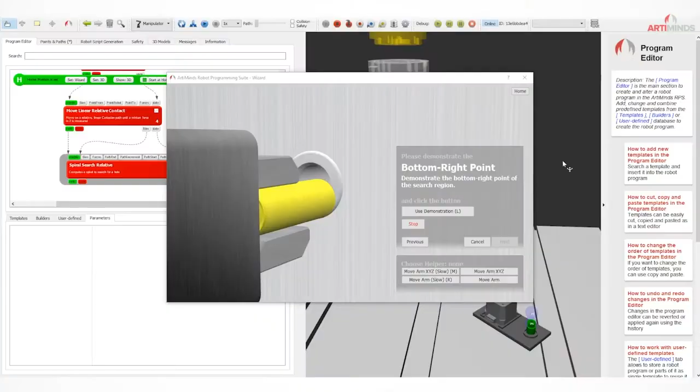Let's say this is my top left point. And we have the top right point. Bottom right point. And bottom left point.

Then we have to demonstrate the optimum, the center, where the search should start. Let's put that here.

And last but not least, I have to tell the robot how far it should drop into the hole until it knows that it hit the right spot. So let's say it has to insert the gear for 3 millimeters. And then I'm done.

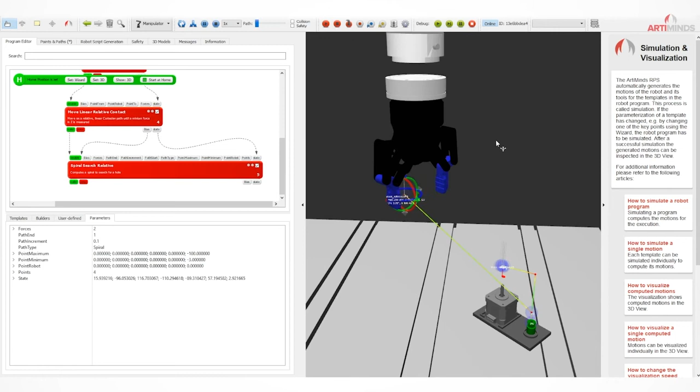So let's see how this looks on the robot. We're driving above the motor, drive down until we hit the force limits. Then we start with the spiral search, and then we're done. All right, now we only have to push it down until it hits the surface of the motor again.

For that, we have a nice template which is called insert. The insert template tries to minimize all the torques which are acting on the robot. So even if you have a little bit of an angle here at the motor shaft, the robot will try to regulate this and control so that it fits nicely.

So for that we are using the insert minimum depth contact template. Again, I'm connecting the bias output to the bias input, and I'm parameterizing this one.

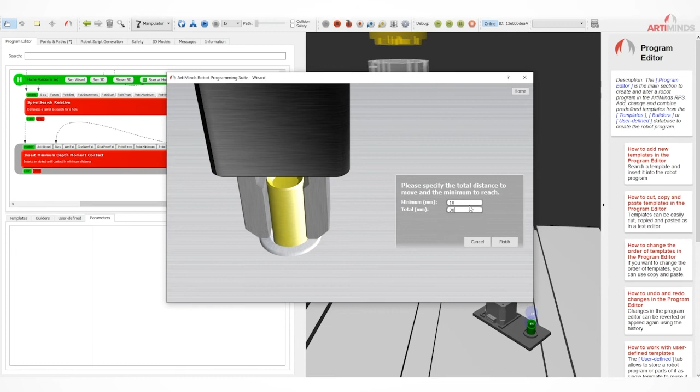So we want to drive down at least 1 centimeter, and then we want to start looking again for the surface until we touch it. In total we want to drive like 30 millimeters as a maximum, and we detect the surface if we exceed 6 newtons, let's say 7 newtons.

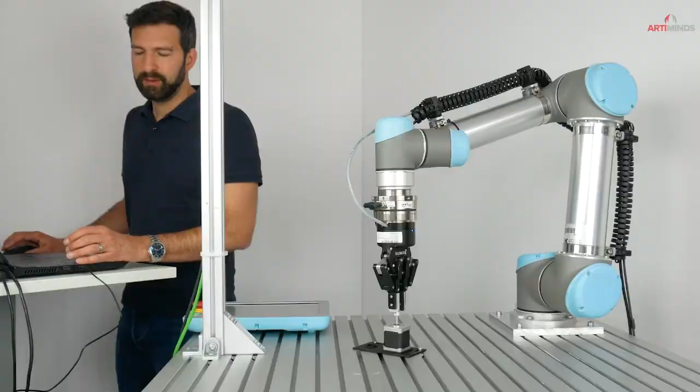So afterwards we can open up the gripper and retract the robot. Let's add an open gripper template, which is already parameterized to open the gripper to the maximum. Then we add a retract motion, which is a move linear relative template.

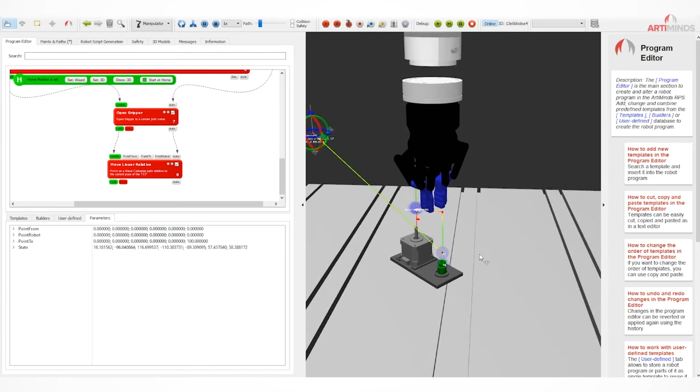Which we teach to drive upwards in Z direction of the robot for 10 centimeters. That's it, let's have a look at the simulation. So our robot is grasping, it's driving downwards. Here we see the red area, which is the spiral search area. And we drive down until we hit the motor, and then we open the gripper and retract.

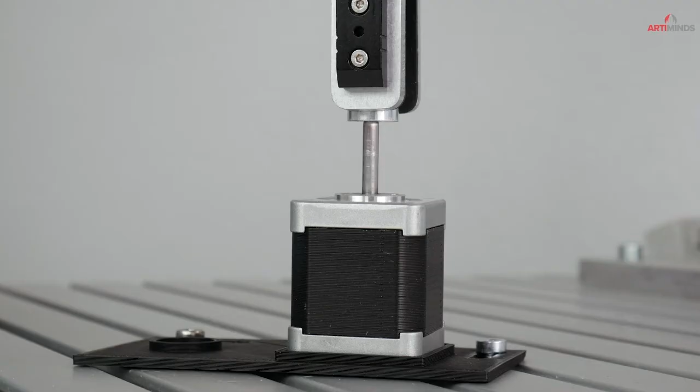Okay, let's try it on the robot. It hits the shaft, it starts to search, it drops for 3 millimeters, then it starts to do the insert motion until it really hits the motor. And that's all. Pretty easy.

Of course, we could add a lot more error handling. What should be done if the part cannot be found? What should be done if the spiral search does not hit something, or if we cannot detect any forces? If the motor is missing completely, we could add a lot more error handling here in the RPS, which we would do in an industrial setup. But for this little demonstration, it should be sufficient.

Let's see if it also works if we position the part at a different position, not at the perfect starting position. So we see the robot grasped it at the perfect center. And if we have a deviation with the motor, we can use the force torque sensor to react on this deviation. And again, we have a nice insert motion. And it hit. Thanks for watching.